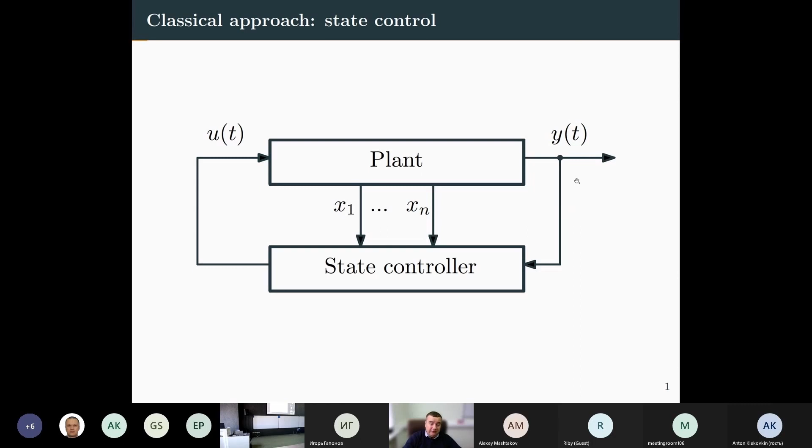In fact, the state variable may be infinite dimensional and for sure not available for measurement. For most cases, we may forget about x, and go to the class of output controllers, which include inside some probably state observers or derivative observers. But in practice, we usually use the measurements of the regulated output variable, and using this information, we try to design the control.

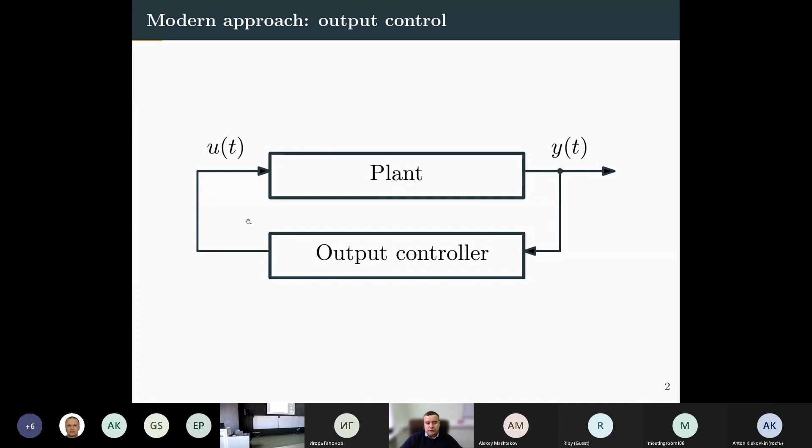And what to do in this situation if the output regulated variable is unavailable? For example, we have an electrical drive, like a motor. The output regulated variables are mechanical variables like position, speed, speed of rotation, but all mechanical variables are unavailable for measurement.

And the input for such a plant is an electrical signal, for example voltage or current in circuits. How do we compute and produce an electrical signal which drives the motor such that the mechanical variables, unavailable for measurement, will be in the desired behavior? This is the actual challenge for output control design.

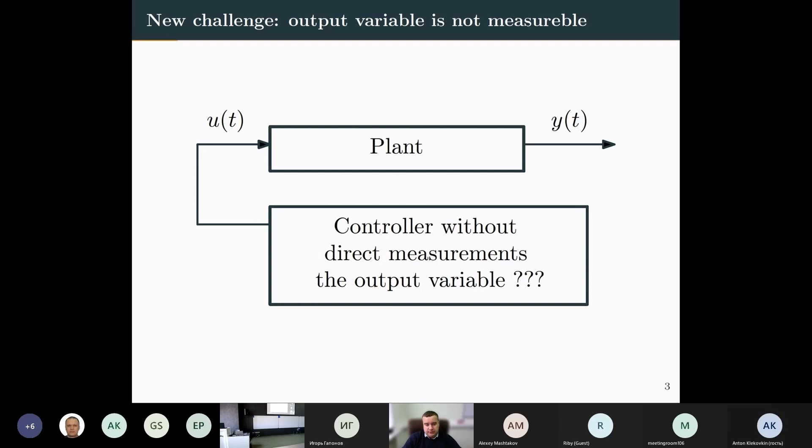In the next step, our conjecture is that we will be able to design an output observer, the observer of output variable y, which is y hat, which will be used in the output controller to be designed further. This is the sketch of our idea.

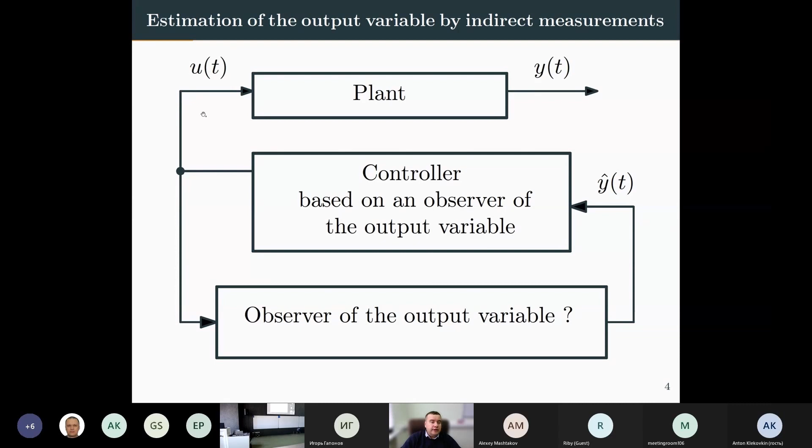So we will try, using the control inputs, to reconstruct the output. As I mentioned before, the main focus is devoted to electrical motors. Synchronous motors are a very popular setup in a lot of applications like cranes, elevators, pumps, even drives in manipulators - synchronous motors are very popular and widely used in industry.

And the problem I would like to discuss is not artificial. Actually, using sensors in such applications brings a lot of problems. For example, long cables used for data transmission bring some noise and troubles, and you would like to avoid cables - to make a jump from Ethernet to Wi-Fi - because you want your system to be more flexible, more reactive, and robust.

And robustness is also a second point. For example, if you have aircraft with electrical drives at very high altitude, all sensors become frozen and imprecise, and the noise produced by your sensors creates problems.

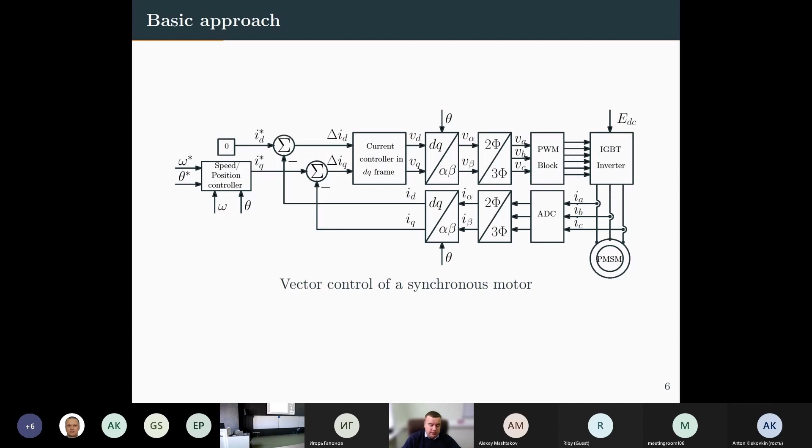And now, what to do if we do not have mechanical variables? We go to the adaptive observer design problem. We need mechanical variables here in Park's transform, theta, which is position or angle, and speed omega, in the speed or position controller. We do not have such measurements. We have only some information about electrical signals, which is current and voltage.

So that's the point, that's the problem formulation. Let's design the speed or position controller for permanent magnetic synchronous motors using only electrical measurements like voltage and current of the stator windings.

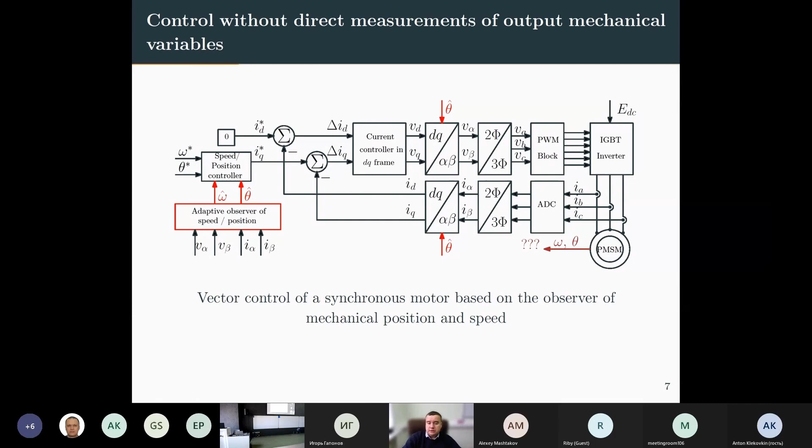Now let's go to the mathematical aspects of this problem. Is it possible or not?

And then we tried to improve the quality of our adaptive observer. We invented the approach DREM, which is dynamical regressor extension and mixing. It also appeared in a very good journal, which allows us to substantially improve the performance in observer design or estimation schemes.

And later, it was proposed an adaptive observer based on this technique DREM, which allows us to reconstruct state variables of nonlinear systems very fast and with restricted requirements.

Literally, we may not require any more persistent excitation of a regressor, and we found the necessary condition, because as it's well known, the persistent excitation condition is sufficient but not necessary. We found the necessary condition, and we found how to design observers such that it will be effective even in restricted conditions.

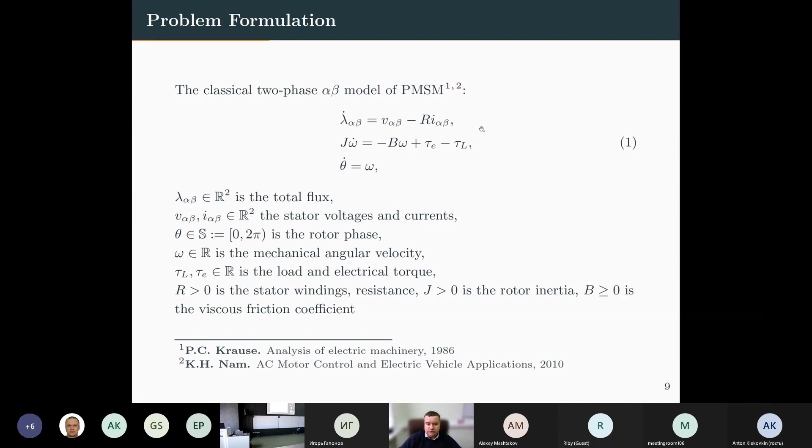So taking the inverse trigonometric function with respect to variables, one can reconstruct theta, the electrical angle of the motor. The question is how to reconstruct magnetic flux.

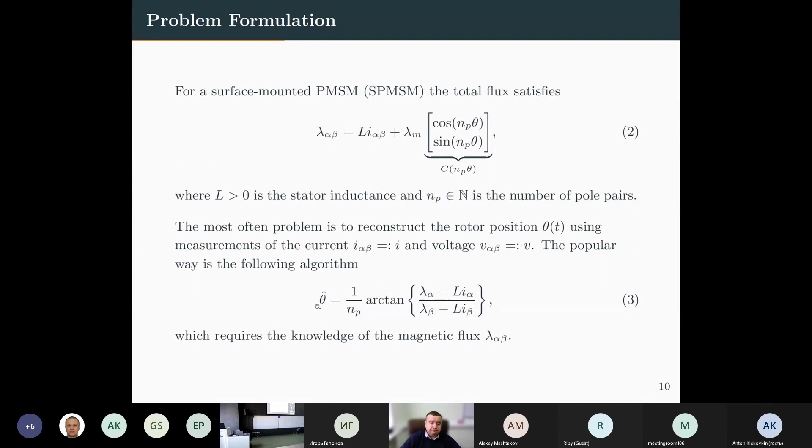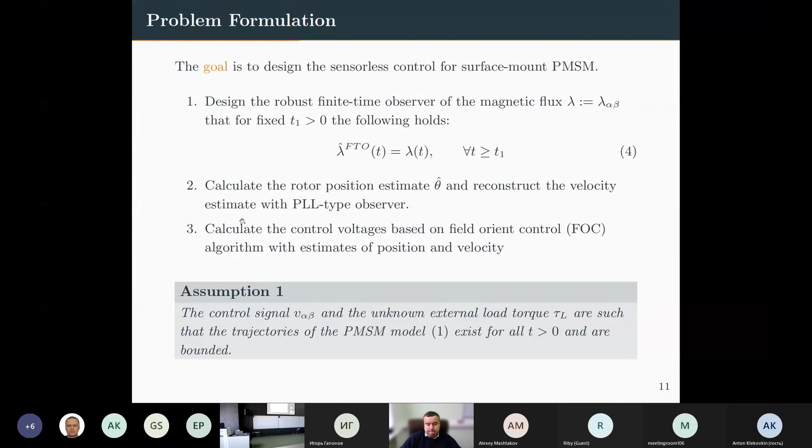That's the problem. And the goal is to design such a controller which is based on an estimate of magnetic flux, and such an estimate which is equivalent to the real magnetic flux after some moment of time. And for the flux observer, maybe I will show the idea shortly in one slide.

We will use such an expression, which was shown before, where C, capital C, is cosine and sine, a special vector of trigonometric functions. And then we may compute that, using the basic trigonometric equation or Pythagorean theorem, we may exclude angle theta, like cosine squared plus sine squared equals 1.

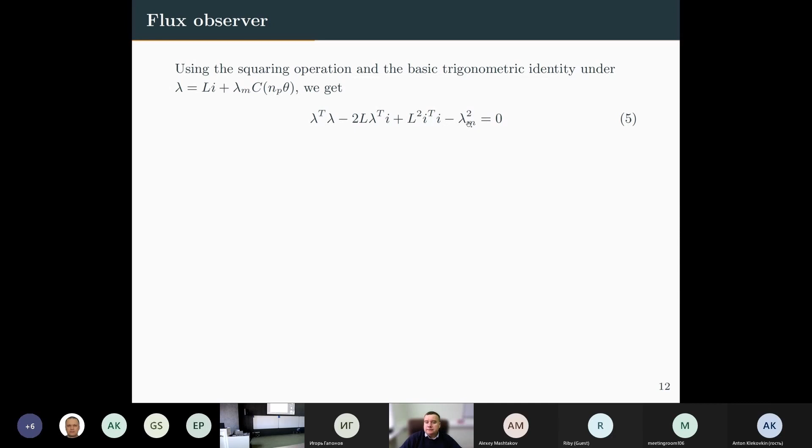And this identically coincides with expression 5, where we have magnetic flux, current, and some magnetic flux from the permanent magnet. And then if we apply the filter, where P is the differential operator, so a first order filter plus one time derivative, we may obtain expression 6.

Where you may see that this term may be computed, this term may be computed, and we have the problem: we have to apply a first order filter to the product of unknown lambda and measurable electrical signals, together with the unmeasurable time derivative of the current. And from this point, we found a very easy way out.

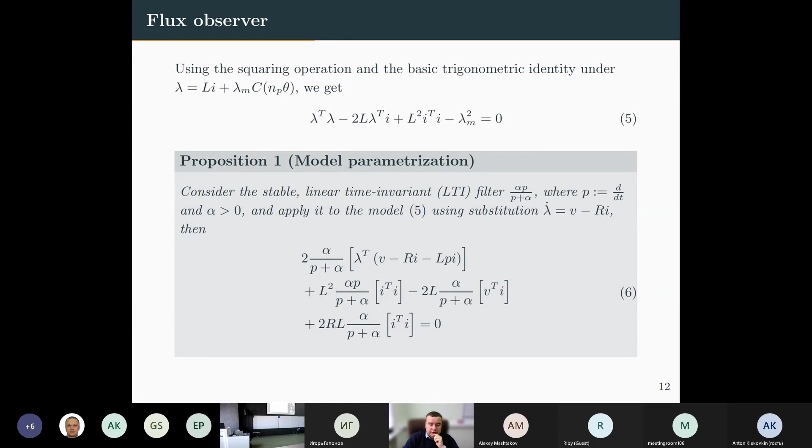The so-called swapping lemma appeared in works of Stephen Morse in the classical adaptive control framework. The main idea is that we have a linear operator H, which is applied to the production of two functions of time, and we would like to pull out one of them - we would like to pull out phi from this operator H.

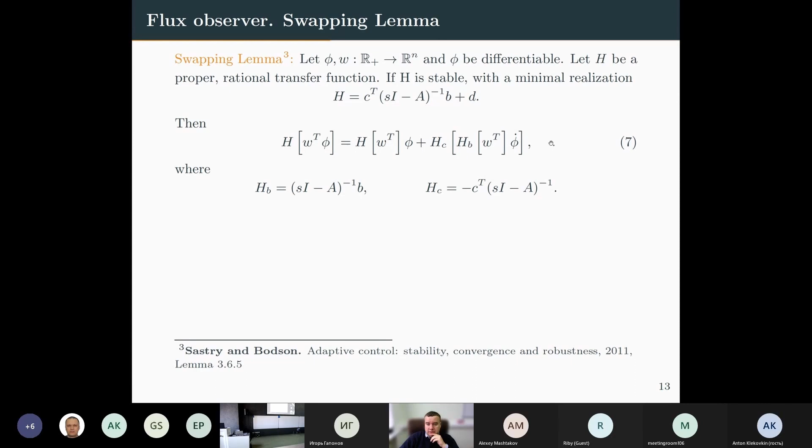And if we use a first order filter like this, it's very simple to rewrite the previous equation into expression 8, where everything is computed and lambda is already independent of computed signals.

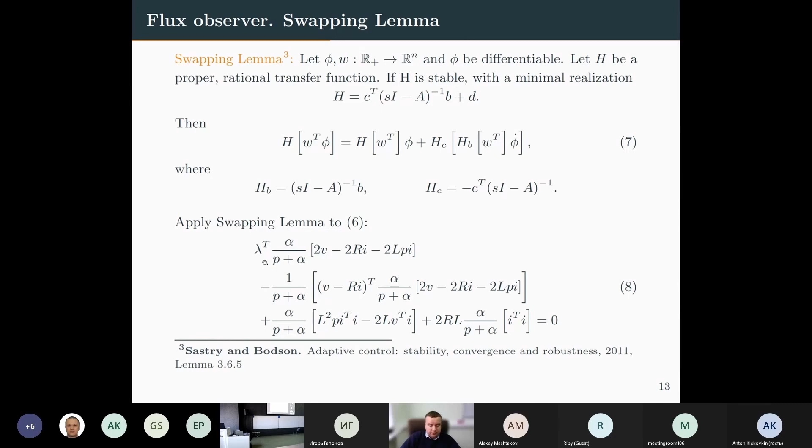Explicitly written in linear regressor form. Now, if we look at equation 8, we may rewrite it in a more compact form, like Z is an available computed signal, G is a computed signal, and lambda is the vector of the flux which should be reconstructed. Z and G depend on our coefficient alpha.

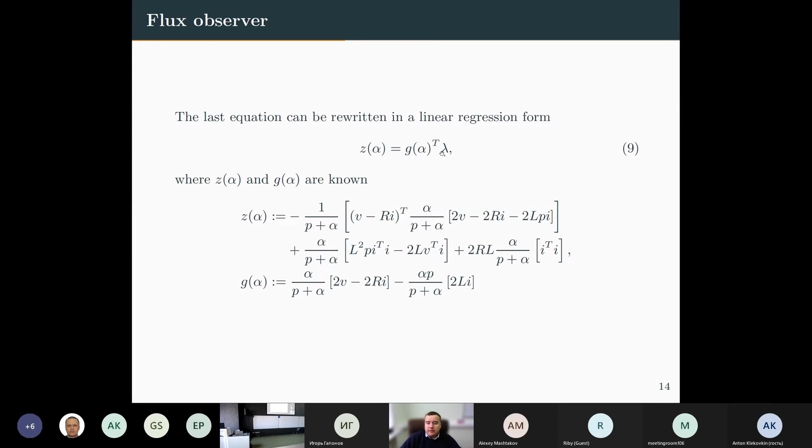Which may be chosen as we want. If we choose different gains alpha, we may reproduce this linear regression several times. For example, we take two different alphas and we get two linear regressor equations with capital Y, which gives two Z's and capital Q. This is the so-called extended regressor.

We combine two regressors and get a dynamically extended regressor. Then what we need to do is the mixing of this dynamically extended regressor equation. It's very easy to show that this matrix equation may be decomposed into a set of scalar equations with available psi and available capital delta, and the main point is that capital delta is scalar.

The determinant of this matrix Q is a scalar variable. Psi is the product of the adjoint matrix Q and the given matrix Y. From this matrix equation, which was very straightforward, we get a set of scalar regressor equations where regressor capital delta is available, and we need to reconstruct only the variable lambda.

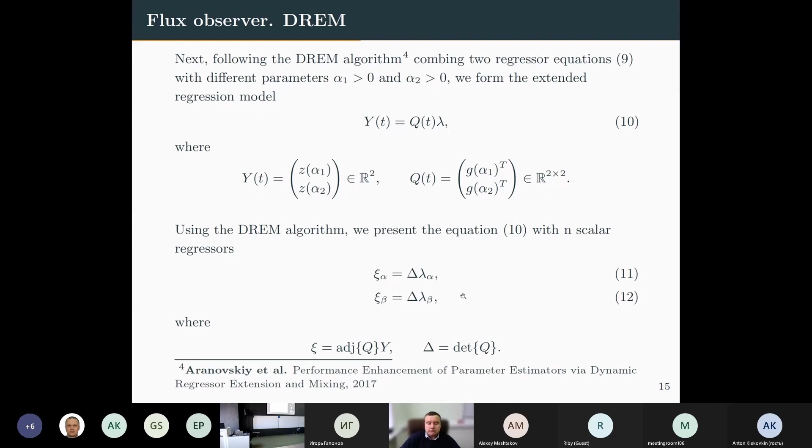The next part is quite simple. Using this delta and this xi, we may design a Luenberger observer for these functions lambda. We know the time derivatives of lambda. This is the correction term.

Using auxiliary variables W1 and W2, we can write the precise equation of finite time estimates. This modification gives us finite time estimates of the flux. All requirements that we need are interval excitation for the variable capital delta, which implies the necessary estimates.

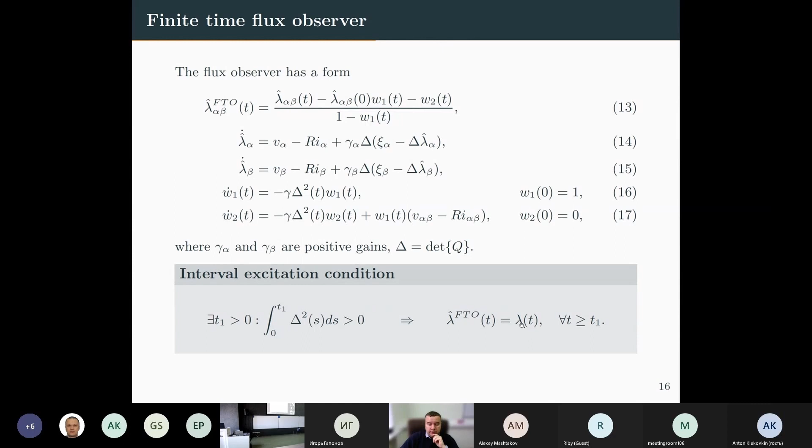Now, position and velocity observers may be written, as already mentioned before, using inverse trigonometric expressions. And for reconstructing the speed...

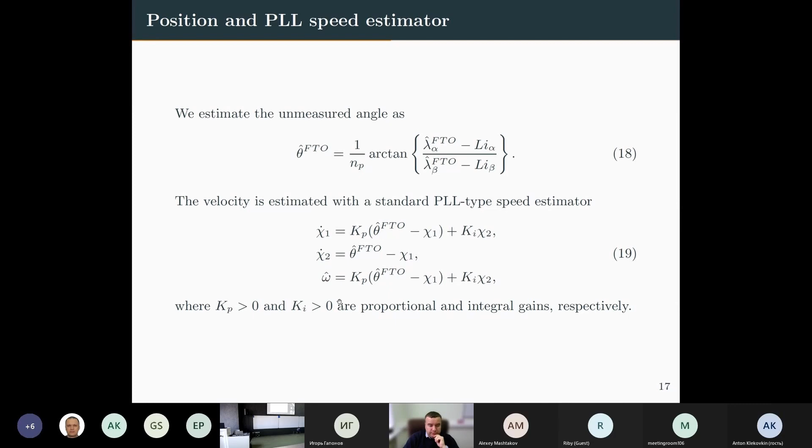Often you may find a so-called phase locked loop type speed estimator, which is given in system 19, which gives an estimate of omega that may already be used in some control design.

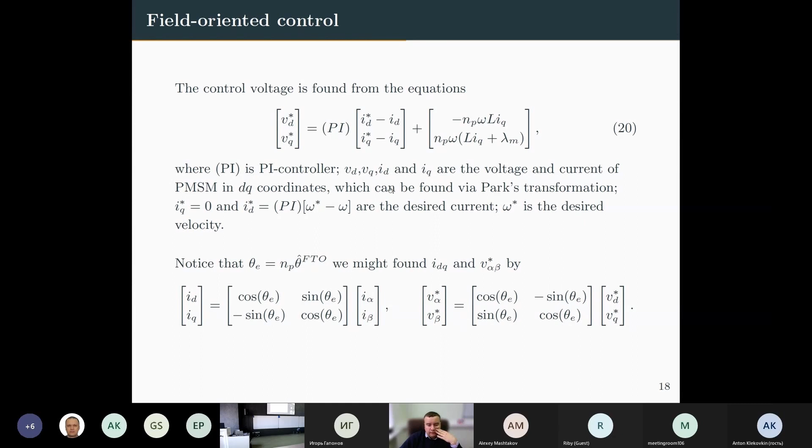The most simplest controller which we may use is field-oriented control, which actually uses some feedback linearization terms and allows us to choose some proportional and integral gains and design something like a PI controller, which is quite simple. But now let me show some simulations of how the adaptive observer works.

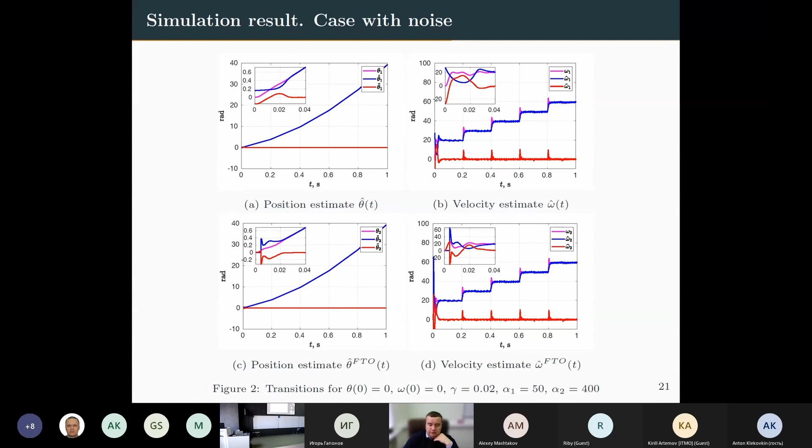And on the next slide, we see how it works with noise. But this is in the simulations - the most interesting part will appear very soon with real experiments.

Now we go to the second block, which is advanced controller for permanent magnetic synchronous motors. I mentioned before that a very simple controller is field-oriented control, but we go further in our research and propose some new controller which may be interpreted like a generalized PID controller. Generalized PID controller means that we generalize the integral part and we will generalize the D part.

Opening some questions, I will say that the generalized integral term is the internal model approach, and the generalized D term is the so-called extended observer proposed by Freidovich and Khalil a few years ago. We will combine these two approaches, and you will see now soon how it works.

In our advanced control, we will temporarily assume that theta is available for measurement, but currents, electrical signals, are unavailable. We would like to design an output robust controller, which allows us to regulate speed and position if we measure only the output variable.

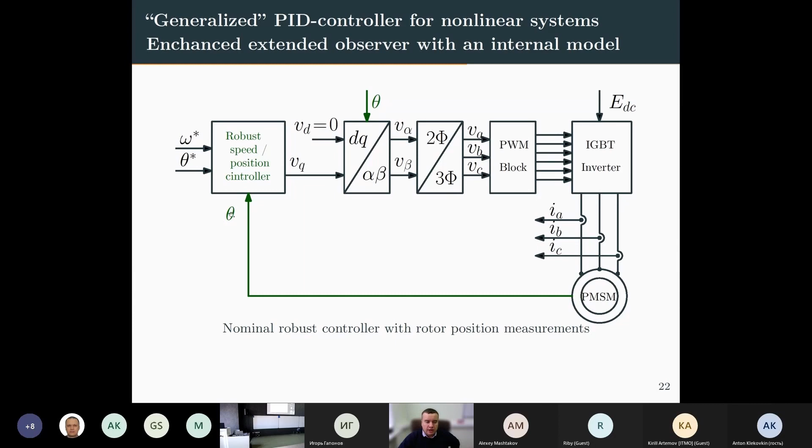For theoretical background, a set of work with Alberto Isidori and myself and my former PhD student Borisov Oleg. We proposed, it appeared in Automatica, some modification of the extended observer, the so-called enhanced extended observer, with respect to the famous result of Freidovich and Khalil.

The main contribution was that we consider the time variant system, and we design an extended observer for the time variant system using Dai's lemma. Then, using this basic approach, we design an advanced controller for permanent magnetic synchronous motors, published in IFAC Congress previous year. You may find all the calculations and derivations in these two papers.

The main idea is to use a geometric approach of Alberto Isidori, and the main contribution is that we found the change of coordinates 21 for the model of the permanent magnetic synchronous motor, where Xi1, Xi2 are the mechanical variables, and Xi3 is the variable which is actually the bridge between mechanical and electrical signals, related to the time derivative of omega. You see that Xi1, Xi2, Xi3 are related to each other like a chain of integrals.

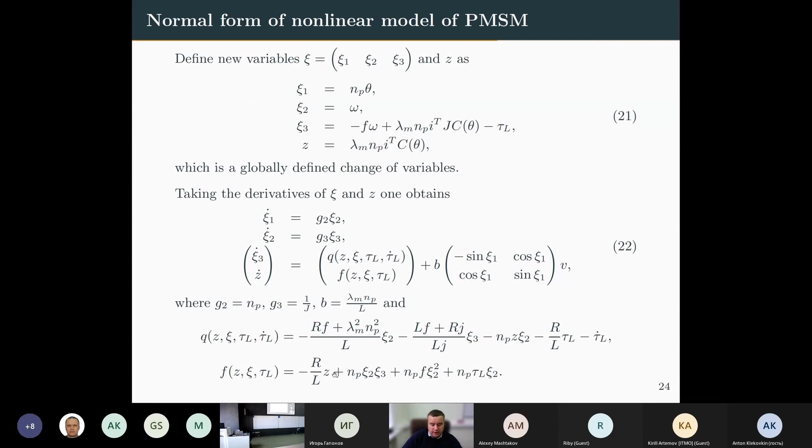From a physical point of view, the zero dynamics is very fast because the coefficient here is negative. If we look at F, this is Z dot equal to this expression, and this is internally stable dynamics.

For example, we may make VD equal to 0. We may use VD as a control and regulate the zero dynamics if we want, but we may relax VD, take it equal to 0, and forget about the internally stable zero dynamics, concentrating only on mechanical dynamics using VQ.

Now we will describe what is generalized PID. The generalized integral component is actually the internal model. The approach was proposed by Wonham 40 years ago—I'm sorry, maybe 50 years ago already. The internal model is incorporating in the control loop a model which repeats the dynamics of the exogenous systems.

For example, if we have a disturbance or a reference, and we know the dynamics which describe this reference or disturbance, we include the model of these exogenous systems in the control loop.

For example, here it's just rewritten in a special form proposed by Isidori based on Nikiforov's lemma, expression 25, which allows us to incorporate it in control. For example, VQ will be the output of this filter driven by a nominal controller U bar, and the dynamics of this subsystem repeats the exogenous system.

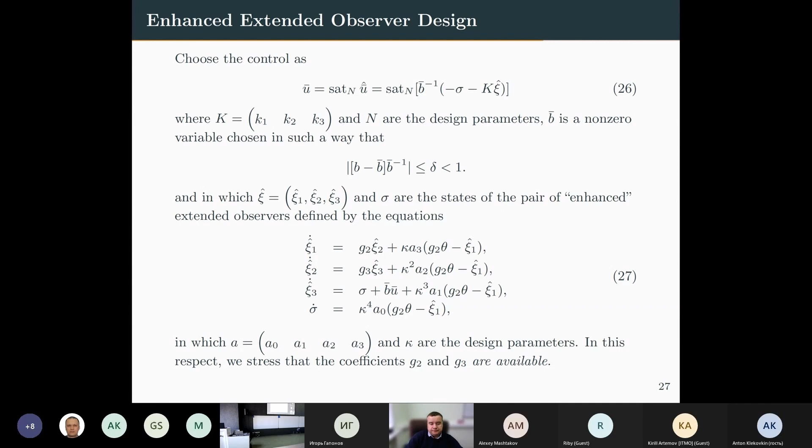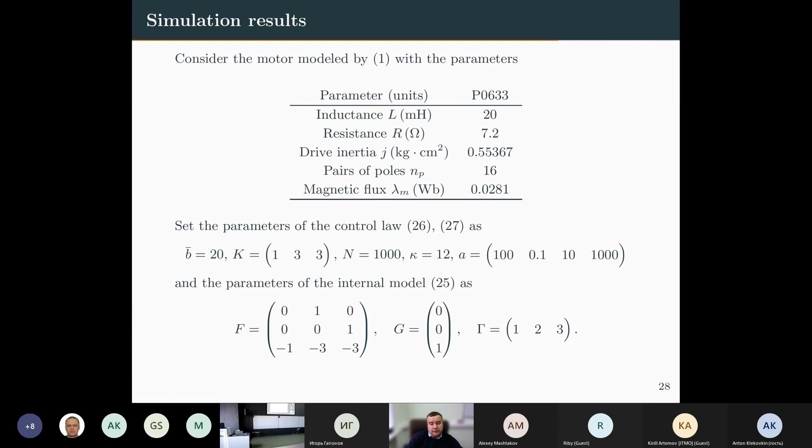And now I will go to simulation results, how it works, combinations of internal model and the extended observer for the motor with real parameters. So without load torque, with constant load torque, and with sinusoidal load torque. In all cases, our reference, our rotation angle goes to the desired value 1, error goes to 0, and we see that it works.

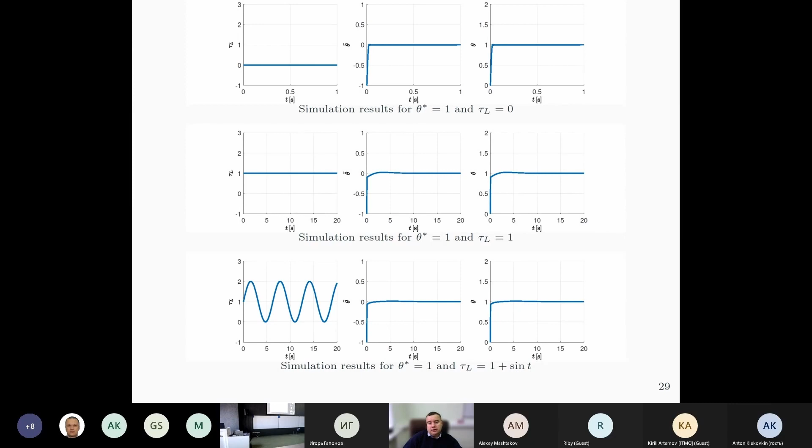So the theory, simulations, just illustrate that the theory works.

And now, generalized PID controller for nonlinear system maybe presented more generally, maybe looks here. So using alpha, using measurements of the current, we may regulate zero dynamics, which is electromagnetic character, and using theta, we may design a mechanical regulation controller.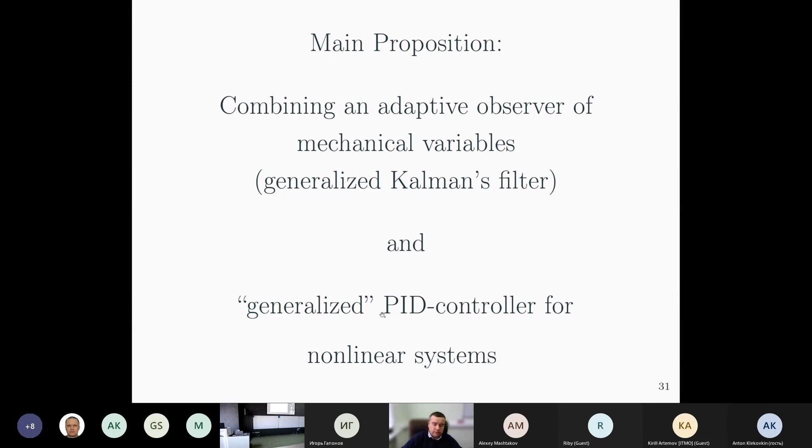And my main proposition is the combination of an adaptive observer of mechanical variables, which was generalized Kalman's filter or generalized Luenberger observer, and generalized PID controller for nonlinear system, which was represented before, with internal model and extended observer.

So applying this concept to our problem, control of permanent magnet synchronous motor, we may propose a so-called sensorless controller. We already know that having only electrical inputs, voltage and current, we may reconstruct position and speed, and use an advanced position controller, which based on one of them, or speed or only position estimate, may provide the convergence

of our mechanical angle to the desired value, or tracking for the desired diagram for the reference.

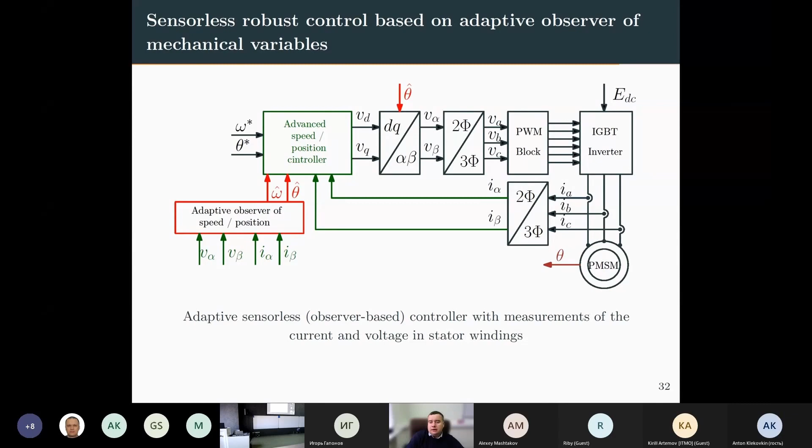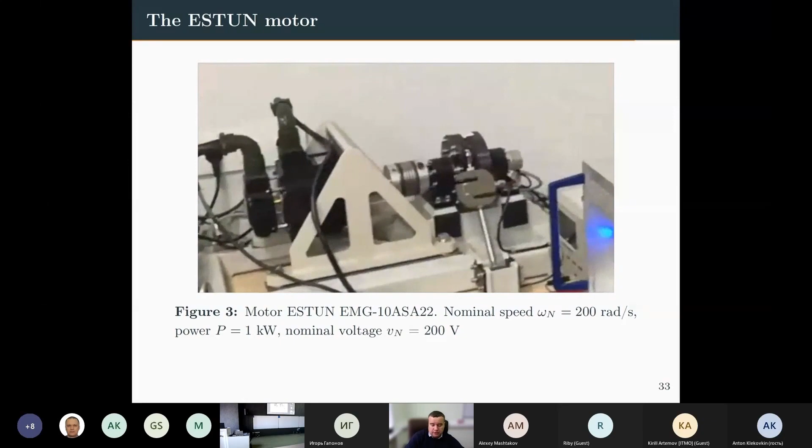And just to conclude my short presentation, I would like to say that we know how to design the state observer for some class of nonlinear systems in finite time. And such a class of systems is, for example, electrical motors or manipulators, or even surface vessel motion, or unmanned airplanes, unmanned aircraft vehicles like quadrotors. So it becomes possible using this technique.

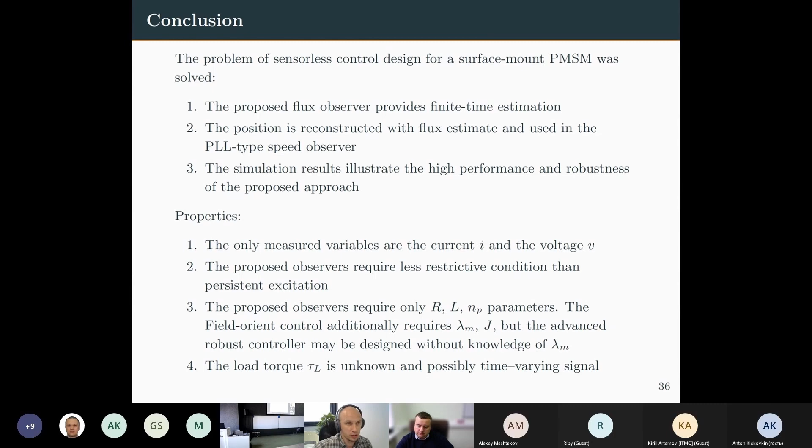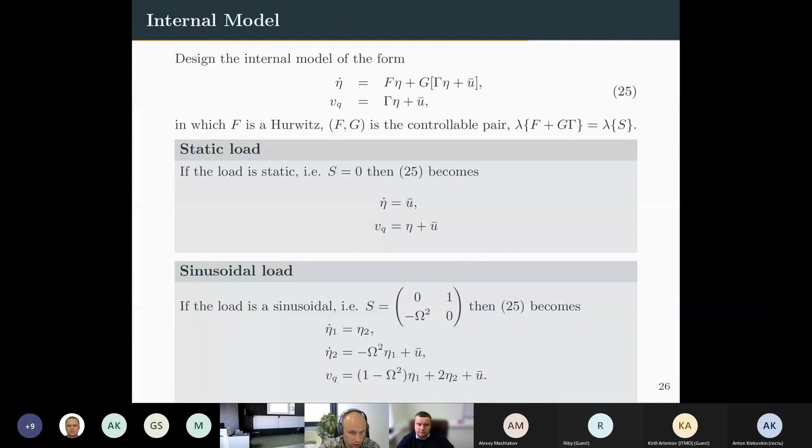Yeah, here, this slide. The idea is, if the current is available, if we know the current, we may robustly design the Q component and D component. If we design the D component, we may accelerate, or control any performance that we want. But we definitely need measurements of the current just to control the zero dynamics. If we do not have current...

In this case, we need measurements of theta. But in a sensorless setup, we don't have mechanical measurements, we only have current and voltage. Using current, we may design regulation for zero dynamics, and we want to design for mechanical variables as well, for zero dynamics and for mechanical variables. This is your choice.

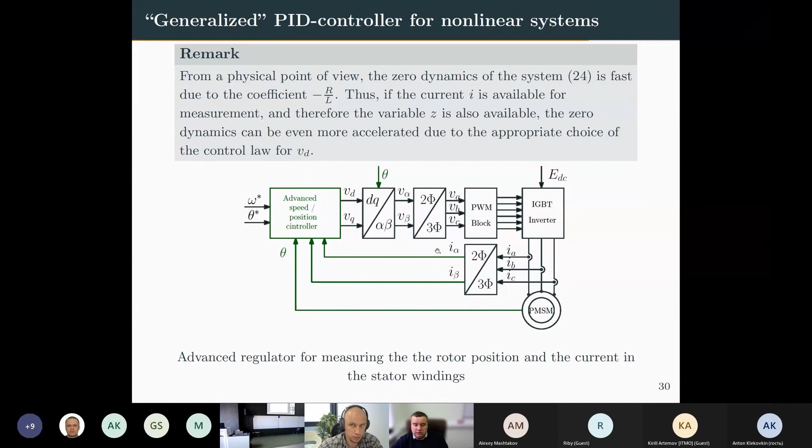You do not need a lot actually for that, because everything is given here. The all dynamics is presented here. The D component drives the zero dynamics, the zero dynamics is explicitly written here, so the equation is obtained, and this is the situation. So if you want, you may control zero dynamics, or you may not care about zero dynamics, because this dynamics is internally stable, and the Q component is necessary for us, because this is the main driver for all this machinery.

I'm not sure I recognized your question correctly, but I think it's about what to do if current is measurable or not. What I meant to say is, in practical motors, it's usually very noisy, often the current measurements. So did you have this problem in your practical setup?

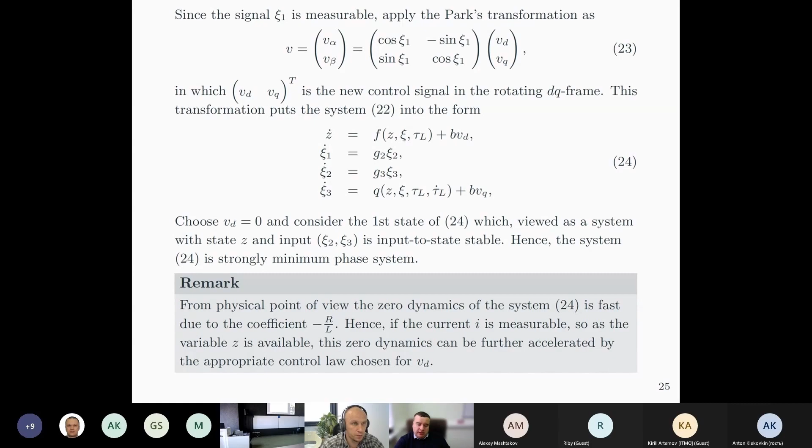So you did not filter it, you used the measurement directly—do I understand correctly? In fact, our controller is a filter, a nonlinear adaptive filter, and tuning of the parameters inside our controller is essentially repeating this filtering function. So the functionality of a filter exists in our approach.